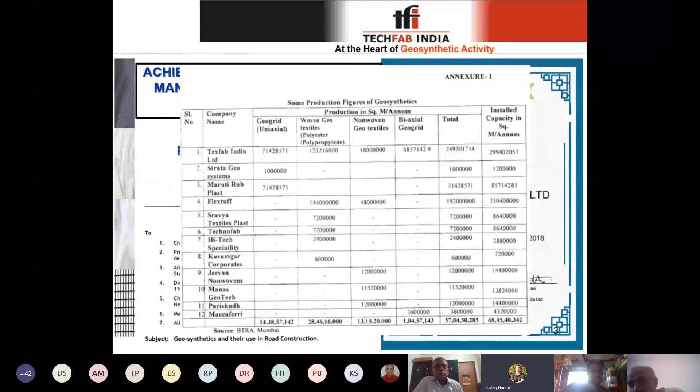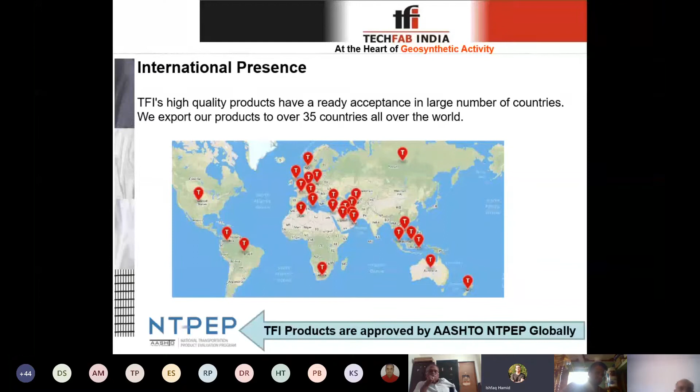Now coming to the baseline of today's discussion, which is application of geosynthetics in ground improvement for roads and associated works. Before beginning the applications of geosynthetics, I would like to give a brief introduction about the basics of ground improvement.

As engineers, we face difficult ground conditions at a project site. We have to employ various possible strategies to achieve the project objectives. The strategies include modification of the existing physical properties of underlying ground in order to enable effective, economic, and safe construction in practical timescales. So we can say that it's a process to alter or improve underlying poor ground conditions containing superstructure, by various geotechnical construction methods for countering insufficient stability, increased settlement, and insufficient bearing capacity.

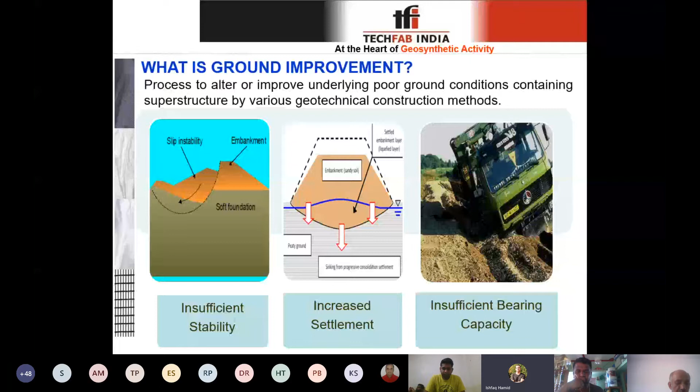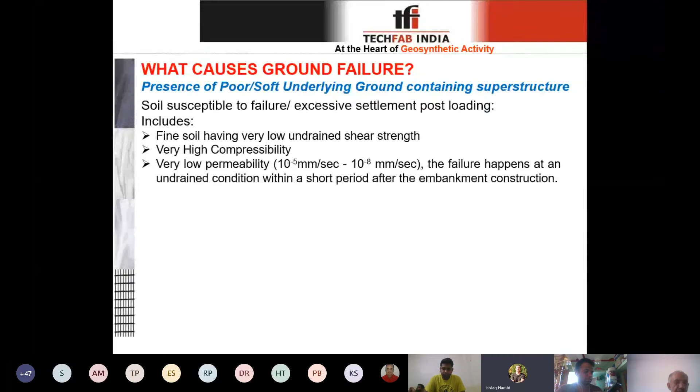The presence of poor or soft underlying ground, which is the basic cause for ground failure, includes soil susceptible to failure and excessive settlement, including fine soils having very low undrained shear strength, soils with very high compressibility, and soils with very low permeability. The failure happens at undrained condition within a short period after the embankment is constructed.

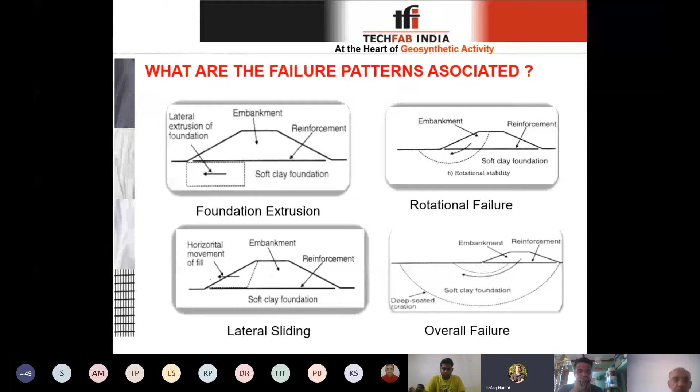On a similar note, the various failure patterns associated with this soft or poor ground are foundation extrusion, rotational failure, lateral sliding, and overall failure. Foundation extrusion is the lateral extrusion of foundation beneath an embankment. Rotational failure is your global failure. Foundation extrusion at horizontal movement of fill is your lateral sliding, and a deep-seated failure that leads to the overall failure of the entire foundation.

Looking into the failures, the causes of failure, and the various failure modes associated, there is a need to prevent excessive settlements of subsoils containing structures like buildings and roads. There is a need to improve shear strength of the fill to ensure sufficient bearing capacity of foundations. There is a need to increase the density of the fill mass to prevent liquefaction. And there is a need to improve the permeability in order to increase the drainage capacity.

So in a nutshell, we can say that there is a need for improved stability, a need for reducing settlement, a need for improving the bearing capacity, and a need for reducing liquefaction, or improving the resistance of soil against liquefaction.

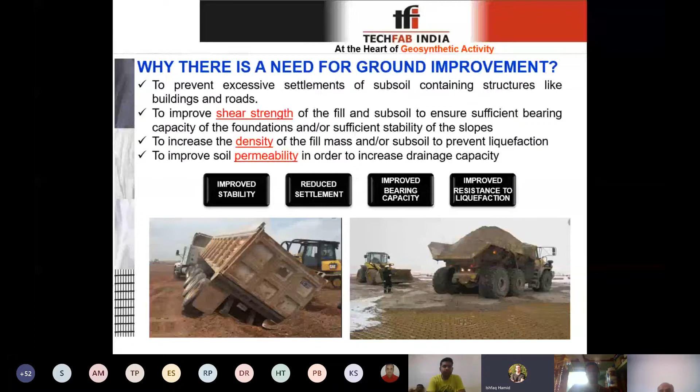Looking into all those needs, all those do's and don'ts, we have seen since earliest times, humankind has found ways to deal with poor ground using simple strategies. The various successful strategies depend upon the type of soil, construction feasibility, commercial aspects, and performance requirements. We shall be discussing about them.

Among all the conventional measures of ground improvement, the first technique which I shall be talking about, which comes very handy, is soil replacement technique. When unsatisfactory material is encountered at or near the surface, it may be economical to remove part of it or all of it. In high embankment projects, removal of 1.5 to 3 meters of unsuitable material from original ground level may be possible for the full width of the fill.

In swampy areas and peat and muck deposits, this type of technique is generally found to be very effective. However, on the whole, this will be governed by the costs involved related to other methods, because anyways, you are going to extract the amount of fill and then replace it with some good fill, and that good fill has to be available in the vicinity of the area.

Another method is staged construction. Staged construction is also a simple and economic method for accelerating consolidation as compared to other ground improvement methods. As the name specifies, it's filling of an embankment at a controlled rate to permit increase in shear strength due to consolidation without failure. However, since it's done at a controlled rate, adequate instrumentation measures have to be taken care of while employing this technique.

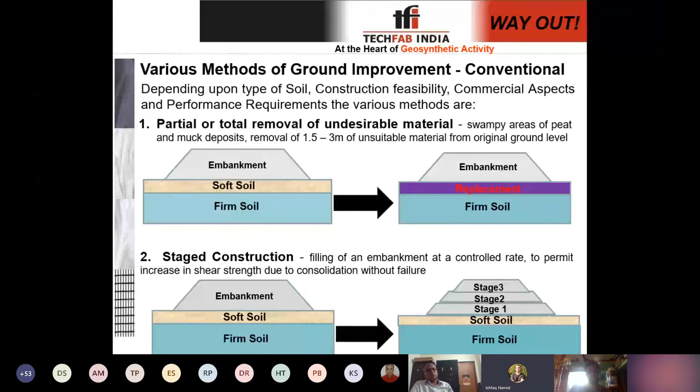Another technique is stabilization, whether it be chemical stabilization, lime stabilization, or cement stabilization. There's a saying about lime, that lime is an excellent choice for short-term modification of soil, especially where the subsoil is of expansive nature, like black cotton soil. And when the depth and extent of poor soil is large, cement stabilization can be opted.

There are other chemical techniques wherein chemical additives are added to the soil in order to form a stiff platform, a solid working platform. The basic intent of this technique is to reduce the plasticity, to reduce the moisture holding capacity, to reduce the swelling index of the soil, and to improve the stability.

For more details, you can refer to IRC SP89, which is guidelines for soil and granular material using cement, lime, and fly ash, for the entire design methodology and the subsequent steps involved.

Another technique, talking about the conventional techniques, is preloading. It's somehow similar to that of staged construction, but other than staged construction, here a heavy weight, a surcharge weight, is placed on top of the embankment in order to increase the rate of consolidation. But as I told you, in case of staged construction and this preloading, adequate instrumentation measures for monitoring the settlements and dissipation of pore water pressure should be essential.

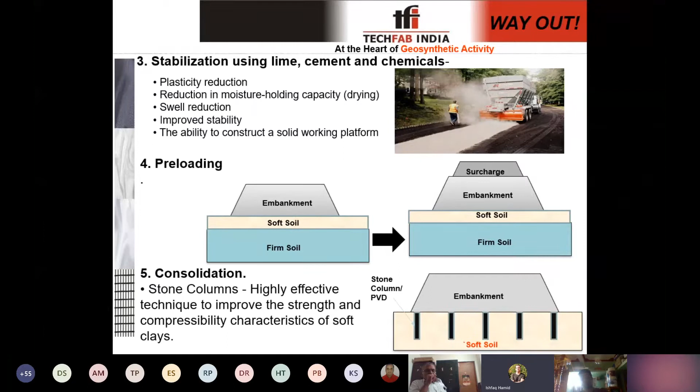So let's now quickly move to the basic context of today's discussion, which is methods of ground improvement involving geosynthetics.

Geosynthetic materials have been used to improve the bearing capacity of the soil and the settlement performance of shallow foundations. Over past few decades, several studies have been conducted based on laboratory models and field tests related to the beneficial effects of geosynthetics on load bearing capacity in roads and associated works.

Today we will be talking about ground improvement techniques using basal reinforcement: Geogrid at the base of the foundation, Geocell mattress at the bottom of the foundation, a subsurface drainage layer used at the base of the foundation for improving the ground, and a separation geotextile layer placed at the bottom of the foundation. Other methods like basal reinforcement with piles, staged construction with inclusion of PVDs, and geotextile encased stone columns will be covered in detail in the next upcoming webinar.

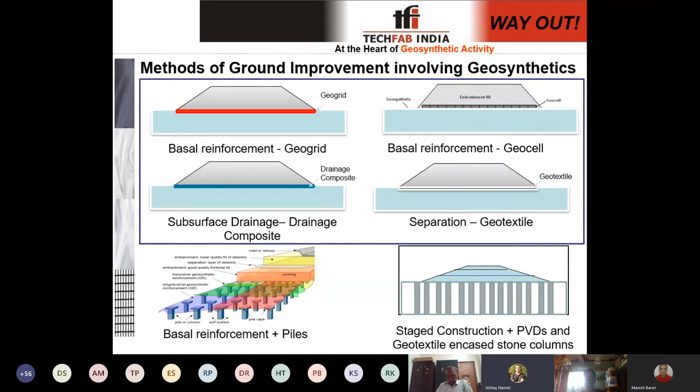So we can see that today, ground improvement for shallow foundations supported by soft soil reinforced with materials like Geogrid, Geocell, drainage composite, and geotextile will be the main crux of today's discussion.

Geosynthetic basal reinforcement is a technique wherein a high strength and stiff geosynthetic reinforcement layer is placed at the base of an embankment in order to improve stability.

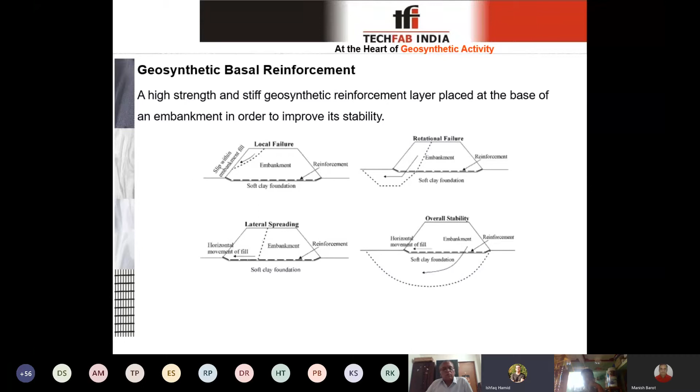This reinforcement is placed at the base of the structure in order to ascertain against local failure, that is slip within the embankment fill, a rotational failure or toe failure, lateral spreading, that is horizontal movement of the fill, or deep-seated failure.

Now, what happens when we are placing a geogrid at the bottom of an embankment or foundation? For any basal reinforcement technique, when you put reinforcement at the base of an embankment, let's say at the end of construction, the entire loads are being encountered by the reinforcement itself.

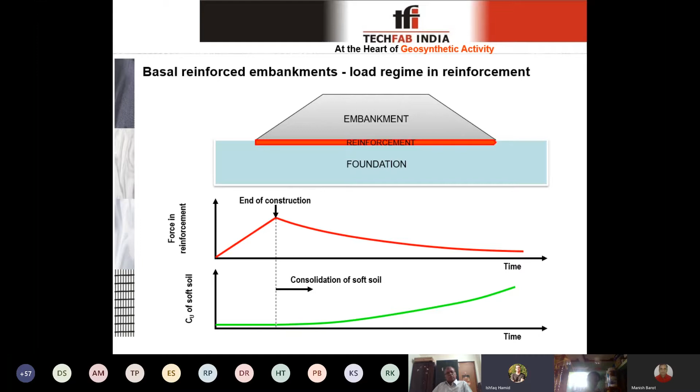But with passage of time, consolidation in the foundation happens at a certain rate depending upon the type of soil and type of loading. After some time, let's say 5-10 years or whatever the consolidation time is, the foundation soil itself gains enough strength to cater to all the loads coming onto it. So we can say after a certain period of time, the foundation is sufficient enough to cater all the loads.

Now, the contribution of reinforcement for stability of an embankment. Since I've told you that today we'll be talking about basal reinforcement using geogrids, geocells, geotextiles, and drainage composites, here we will discuss the contribution of each layer of reinforcement. You can see in the slide, there are two cases.

First case is an embankment that is unreinforced, no reinforcement placed at the foundation level. Second case is an embankment wherein a geogrid reinforcement is placed at the bottom of the foundation as basal reinforcement. In the unreinforced case, vertical and outward shear stresses act onto the foundation, leading to problems like slip failure and lateral extrusion.

Now, in order to counter the same problem, we are putting our reinforcement at the base of a foundation. The vertical and outward shear stresses are now being countered by the reinforcement. The intensity of the vertical forces is reduced to some extent due to this geogrid, and the intensity of outward forces is totally opposed by the reinforcement geogrid.

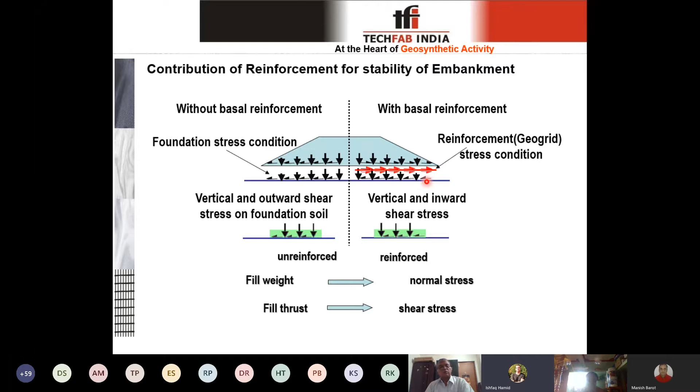On a similar note, contribution of reinforcement at the base of an embankment: again comparing unreinforced versus reinforced case, when we place a geocell mattress layer as basal reinforcement, the vertical and outward stresses get dispersed by the confinement and stress dispersion effect of the geocells. So the loads coming onto the foundation are dispersed and their intensity is reduced to a maximum after using this geocell reinforcement at the base of the foundation.

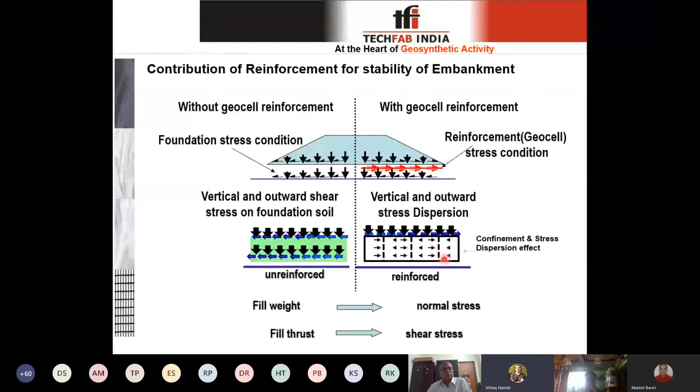Again, the contribution of a separation or drainage layer for stability of an embankment. Earlier we used a geogrid, then a geocell; now we are using a high strength woven geotextile at the base of the foundation. This geotextile will prevent the intermixing of two different fills and will reduce stresses to some extent because of its high strength.

And if the same high strength geotextile is replaced by a drainage layer, let's say a drainage composite, which is a combination of non-woven geotextile and a high strength polypropylene core.

A high strength polypropylene tensile strength core is sandwiched between two non-woven geotextiles. The two non-woven geotextiles act as a medium preventing intermixing of two different fills. The polypropylene core, having its own strength, adds additional strength and reduces stresses coming onto the foundation. Further, the drainage core maintains the safe passage of pore water throughout.

Depending upon the type of problem or scenario we are facing at the site, we can choose among different methods. We have to decide which method to opt for based on what the problem requires. If we don't have much stress to disperse and only need a separating medium, we can go with a woven geotextile layer. Or if we need to improve drainage, we can use a drainage layer. Or else, if there are enough stresses coming onto it, then we can...

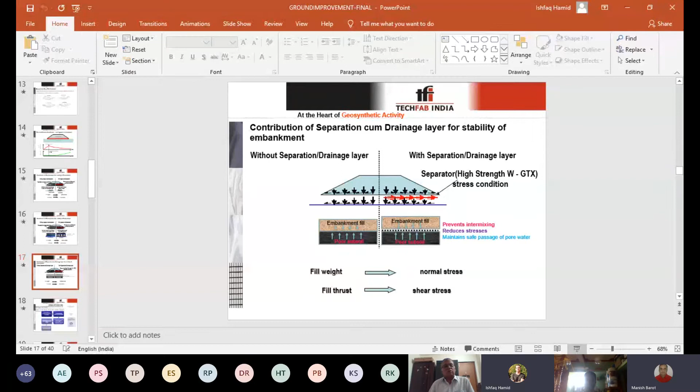So continuing, among all the different methods we were discussing, you can place a high strength geogrid at the base of an embankment just to take care of local failure. You can use that technique.

Or else if there is a problem that our foundation is lagging in bearing pressure or bearing capacity, then you have to improve the bearing capacity of the soil, or reduce the stresses coming into the foundation. Then you have to go with another method, using geocell at the base of the foundation. That is another basal reinforcement technique.

Now if stress dispersion and reducing stresses is not a big concern, but you still need to separate two different filling mediums, then you can go with a high strength woven geotextile placed at the foundation level.

And if there is a problem where you want to take care of drainage coming onto it, so as to maintain the safe passage of pore water, then you can use a drainage composite layer in between the foundation and the embankment fill.

So depending upon the sort of problem which you are facing, you can choose any of the methods we were talking about, because depending upon the contribution of the reinforcement, the entire design methodology will be working on that.

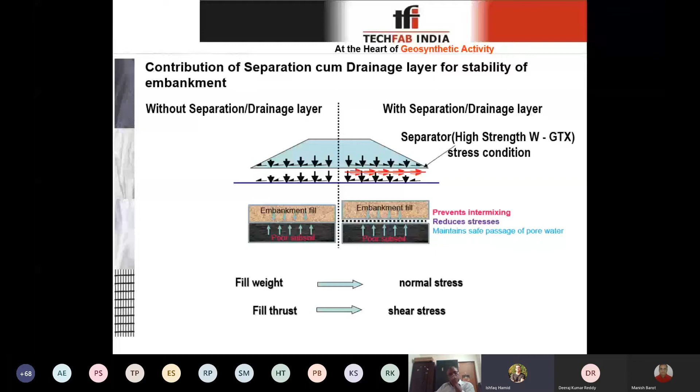Now talking about the design methodology, the design of geosynthetic reinforced embankments on soft soils is mentioned in IRC 113:2013. It's as per section 5.2.11 of IRC 75:2015, and section 3 and section 5.1 of IRC 113:2013.

The design methodology is simple. It involves determination of effective pressure coming onto the foundation, then considering a trial reinforcement at the base, then determining the safety factors against rotational failure using the slip circle method, and determination of safety factors against lateral sliding. Once these factors of safety are coming safe, then your trial reinforcement is okay.

If it's not coming safe, then you have to increase the reinforcement. You can increase the grade of the reinforcement, meaning the tensile strength has to be increased, or you can increase the number of reinforcement layers, or reduce the spacing between the layers, because there are a lot of things which benefit once you are interpolating the data for designing a geosynthetic reinforced embankment on soft soils.

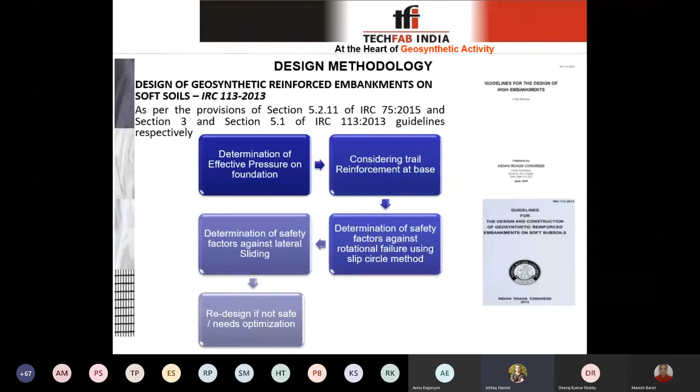On a similar note, the evaluation of bearing capacity calculation methods for Geocell have been given by a lot of researchers, like Koerner's method given by Koerner, Presto's method, apparent cohesion method, and Avesani Neto's method.

The most common thing among all these methods is that the methodology involves initially determining the effective bearing pressure on the foundation, then again considering a trial reinforcement at the base, then determining the reduction in pressure due to reinforcement, because Geocell has a stress dispersion and confinement effect which will reduce the pressures coming into the foundation.

Then determining the safety factors against bearing failure, and though we have reduced the pressures coming onto the foundation, there can still be found some sort of reduction in the settlement also. Then you determine the safety factors against settlement, and if it's coming safe, then it's okay.

If it's not coming safe, then we have to interpolate the data again.

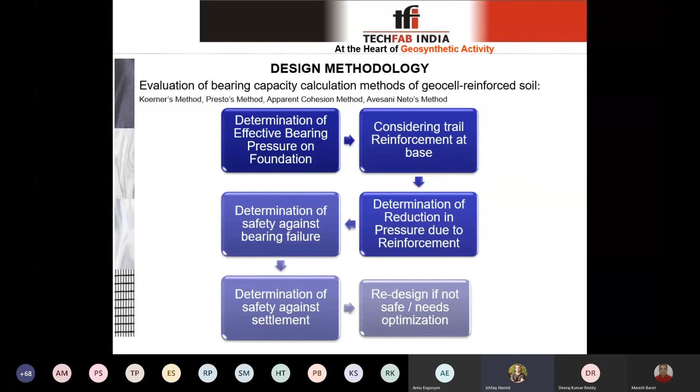Now, how is it done by TechFab India? Because we have been dealing with problems of ground improvement, and we have been employing Geocells and Geogrids for the same for a very long time. So I got this opportunity of sharing with you a sample calculation so that I can tell you how exactly it is done when problems like that come to TechFab India.

As an input, you will get the maximum gross weight coming onto the foundation, from which we can calculate the maximum bearing pressure coming onto the foundation. You will also get the foundation properties and the shear parameters of the soil. Looking into the shear parameters of the soil and the maximum gross weight or bearing pressure coming onto the foundation, you can initially calculate the safe bearing capacity of the soil.

Yeah, you can calculate the safe bearing capacity of the foundation, then compare it with any of the conventional methods. In this calculation, with such shear parameters and such loading, I have done two different iterations. The first iteration was done by replacing a patch of soil beneath the underlying structure.

When it was replaced, let's say 1.5 meters of sand patch was replaced with good soil. After replacing it with good soil, there was certain improvement in the safe bearing capacity which was found, but that improvement was not sufficient enough to cater to all the loading which was coming onto it. So that was only for 1.5 meters of replacement of soil.

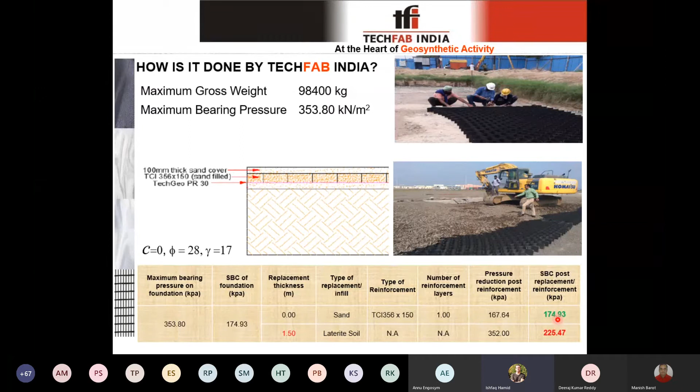But for the similar case, when we used our geocell, one layer of geocell filled with sand, we found that after employing this geocell, the pressure coming onto the foundation was reduced, the intensity of pressure was reduced, and finally the bearing capacity of the soil beneath the foundation was sufficient enough to cater to all the loads. So this is how it works in comparison with all the conventional methods which you have.

In addition to ground improvement, geocells are also used for subgrade stabilization and thickness reduction, as the details are mentioned in IRC SP 59-19, and the detailed example as mentioned in annexure number 4 is also given in IRC SP 59-19.

So geocells can be used to improve the effective CBR of prepared subgrade, and when used in granular material, they can result in considerable reduction in thickness of the corresponding layer. For the entire design methodology, you can refer to IRC SP 59-19, with a stepwise installation methodology mentioned there in conjunction with IIT PAVE and IRC 37-18. You can just design the same.

There are some PMGSY and PWD projects wherein we have employed such methodology for subgrade stabilization. A few case studies I have also attached. I will be sharing that knowledge with you in the upcoming slides.

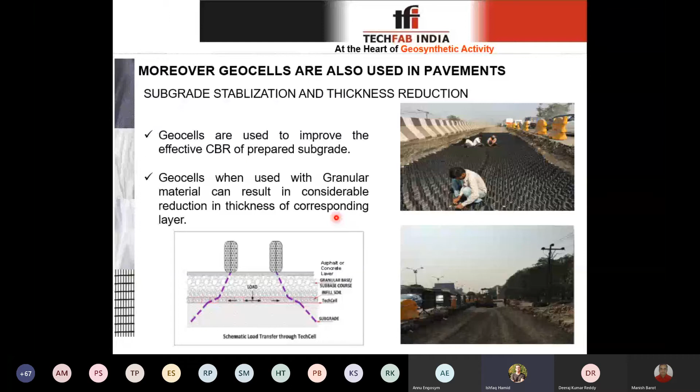The geosynthetic ground improvement, especially the geocell ground improvement, depends upon a lot of factors. The bearing capacity of a geocell reinforced soil changes with various factors: the type of reinforcement you are using, the number of layers of reinforcement, the weld spacing, and the cell depth. These two parameters have a great influence on reducing the pressure coming onto the foundation.

Depending upon the basic design methodology of the geocell load reduction procedure, the geocells which we provide and manufacture are textured with polyethylene strip consisting of multiple rhomboidal indentations over the entire strip area on both sides.

The advantage of having multiple rhomboidal indentations on the entire strip is that the indentations or textureness on the sides of the geocell enable interface friction between the fill and the cell, and that reduces the pressure going into the foundation, reducing the intensity of pressure after using a textured geocell. Further, our geocells are perforated.

The polyethylene strip is perforated with horizontal rows of maximum 10 mm diameter holes. Once a geocell is filled with a granular layer, these holes help in maintaining effective drainage within the area. For instance, if you are using a geocell for subgrade stabilization, you are stabilizing the prepared subgrade while also improving the drainage capacity of the entire pavement structure.

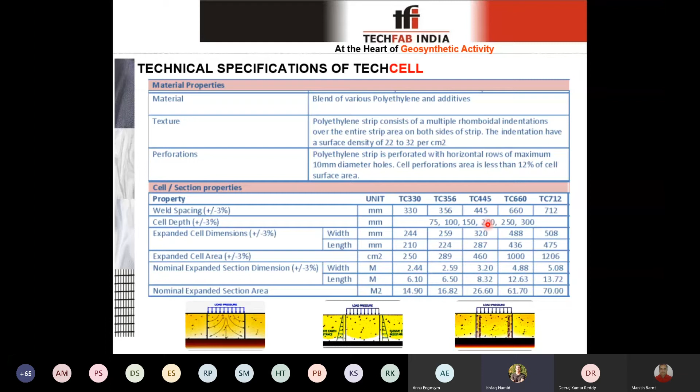Other than that, BIS has also worked into the formulation of guidelines like the Ganga Flood Control Commission, GFCC, which has prepared a different guideline for the use of geosynthetics in river training works. CWC guideline is also there.

But from the past 5 or 10 years, IRC and BIS have speedily started revising and drafting new codes and standards for the use of geosynthetics in geotechnical and hydraulic engineering applications, in order to minimize the exploitation of natural resources and reduce the emission of carbon footprint.

Looking into that initiative, a few BIS codes published recently include IS 16362-2020, a specification for geotextiles used in subgrade stabilization in pavements; IS 17312-20, specification for geogrids for flexible pavements; IS 17373, specification for geogrids used for reinforced soil retaining structures; IS 16345, a guideline for installation of geotextiles used in subgrade separation in pavements; and IS 16380, test methods for measuring pull-out resistance of geosynthetics.

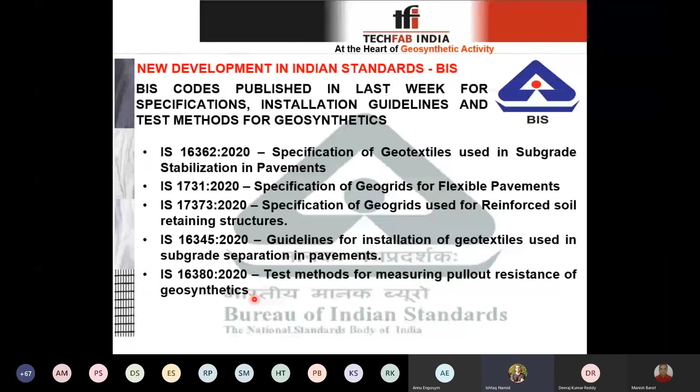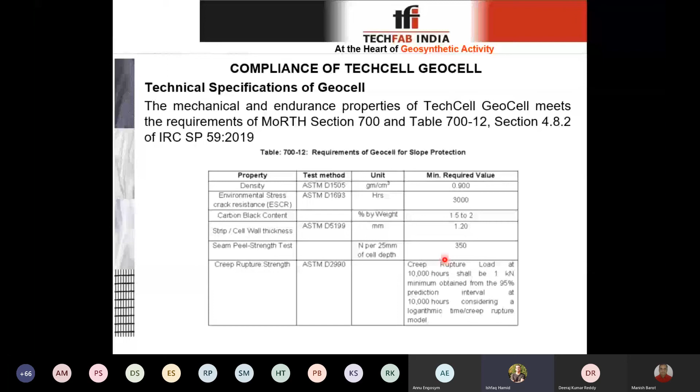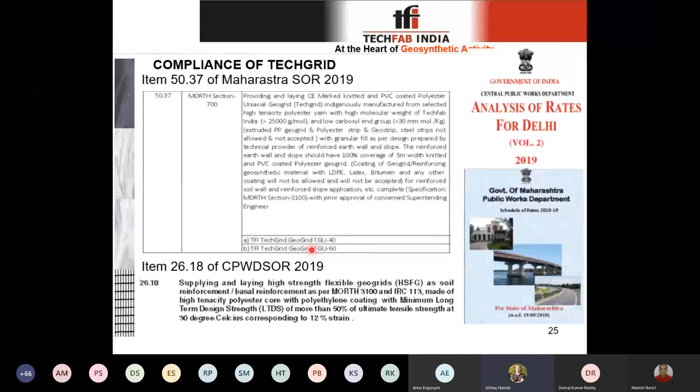Now talking about rate analysis and SORs, item number 50.37 of Maharashtra SOR and item number 26.18 of CPWD SOR 2019 both contain specifications for various variants of uniaxial geogrids used for basal reinforcement for embankments. Item number 50.38 of Maharashtra SOR 2019 provides complete specifications and rate analysis of various variants of geocells used as basal reinforcement foundations.

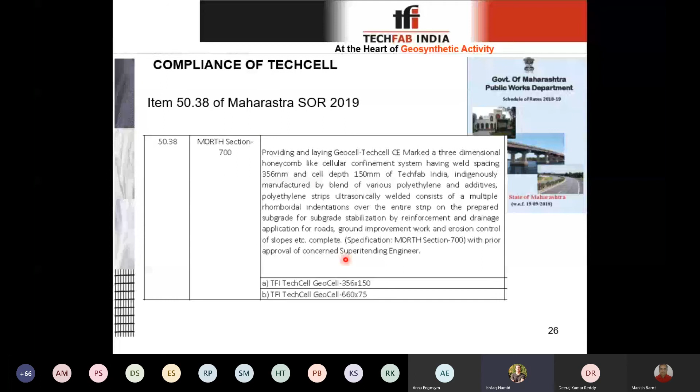As far as product testing is concerned, the important properties of geosynthetics, geogrids, geocells, woven geotextiles, and drainage composites, like creep elongation, connection strength, tensile strength, installation damage, and durability, are all checked by BTRA Mumbai, that is Bombay Textile Research Association, and all our products are BBA, CE, and BVQI certified.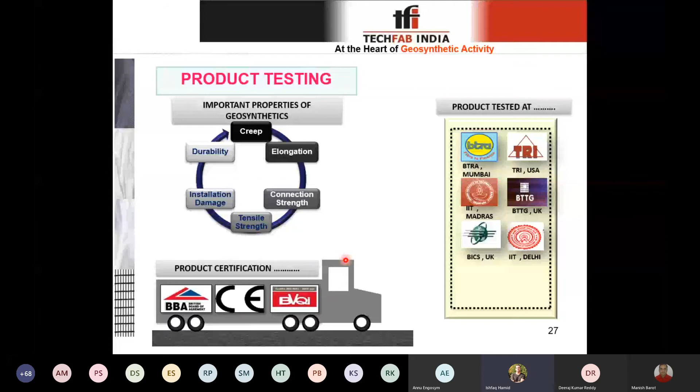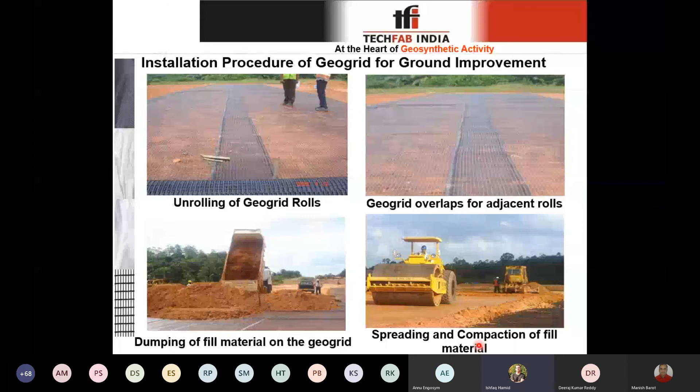Now, talking about an insight into the installation procedure for Geogrid for ground improvement, it includes unrolling of Geogrid rolls, overlapping of adjacent Geogrid rolls, dumping or spreading of fill onto the Geogrid, and finally compaction of the fill material.

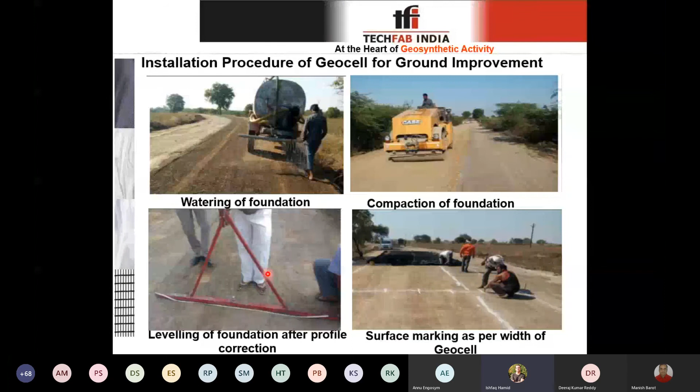On a similar note, the installation procedure for Geocell includes foundation preparation, that is watering of foundation and compacting it, then leveling the foundation after profile correction, surface marking as per the width of the geocell, unfurling of geocell, tying of geocell units with tying band, dumping and spreading of fill onto the geocell, and finally compaction of fill material.

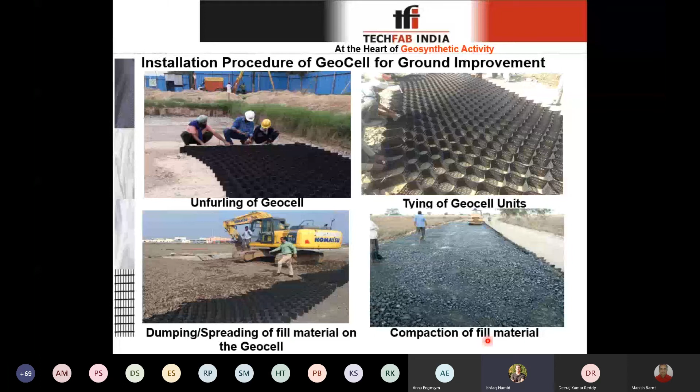Before concluding, I would like to share some case studies of TechFab India, wherein we have given our solutions for ground improvement applications in our own country.

The first one is development of an integrated centralized parking zone for parking of tractor trailers at the JNPT area. JNPT Port Authority decided to build a parking lot to reduce the problem of stranded heavy trucks entering the terminal. The parking lot had to accommodate 1,553 trailer tractors, and for convenience, it was a condition that the parking lot be built near the port for easy access.

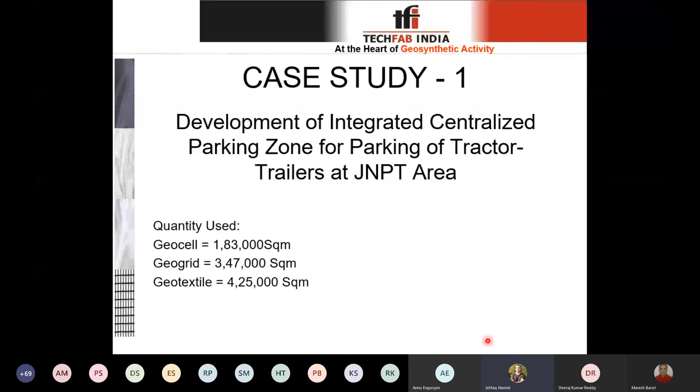Now the problem with the port was that the site was near shoreline areas close to the port, and the foundation soil was soft marine clay. And though it was a parking lot, it had to anticipate huge traffic loading of stationary vehicles.

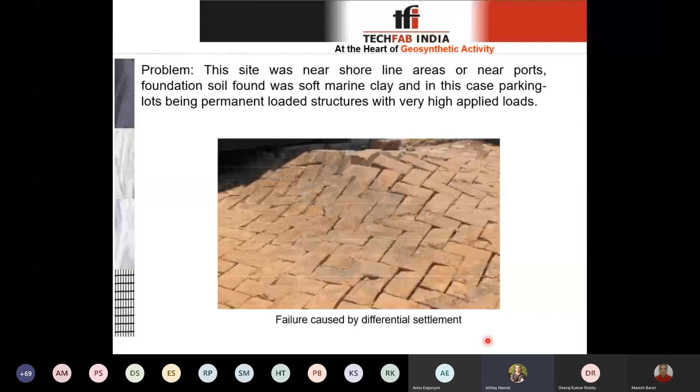For heavy trucks and trailers, the solution proposed was TechCell Geocell infilled with granular material at the base, in conjunction with Geogrid for stabilization and stress dispersion, and a non-woven geotextile placed as a separator beneath the sand layer containing 100 mm concrete.

These are some project photographs of the same site. This is the Geocell, which separates and aids compaction, then a Geogrid layer, and this is the layer of non-woven geotextile.

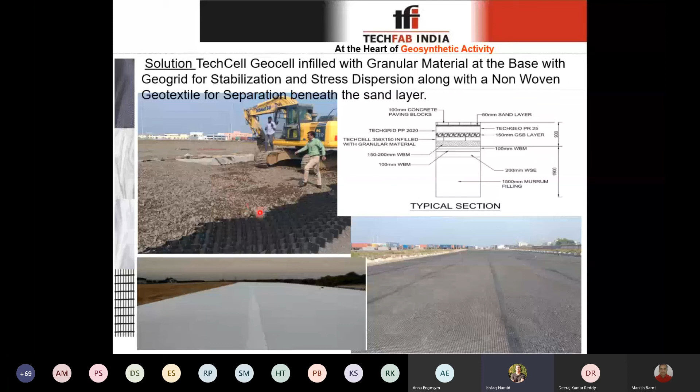Another case study is about a housing scheme with buildings. As I mentioned, ground improvement techniques are not only for roads and associated works, but can also be employed under buildings. One site was in Andhra Pradesh, near the coast, where the foundation soil was black cotton soil with very low bearing capacity.

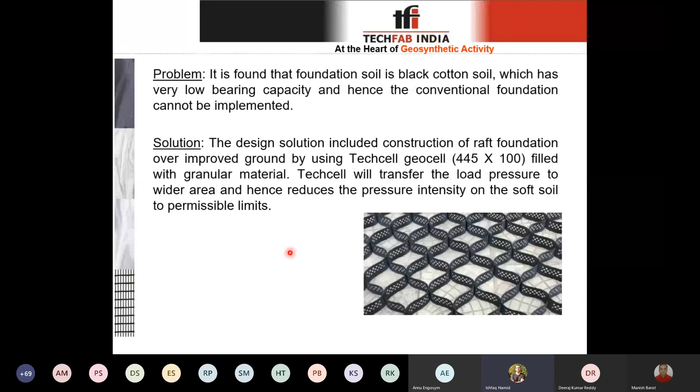It was difficult to adopt conventional ground improvement techniques, so to speed up construction, TechFab India installed TechCell Geocell filled with granular material, intended to transfer load pressure to a wider area, in conjunction with polypropylene biaxial geogrid and polyester geogrid on top.

Just to clarify, this is a low-level housing scheme, so only single-story buildings, not ground improvement for multi-story buildings. Thank you.

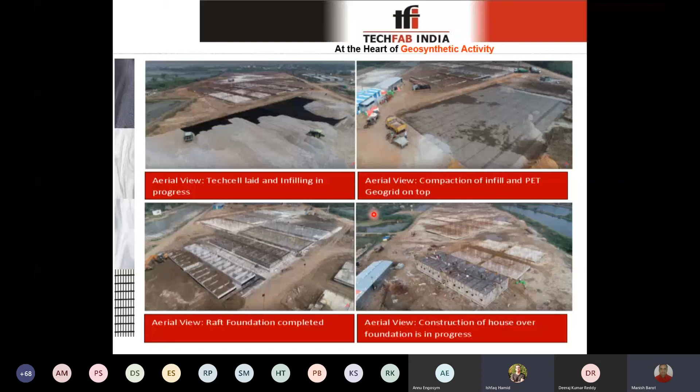This image shows the filling of the geocell with granular material. Some aerial images follow, including an aerial view of the raft foundation placed onto this ground improvement, with construction of the house foundations in progress while we were drafting this case study.

Another case study was subgrade stabilization using TechCell Geocell for the Sion Panvel Expressway, Mumbai, Maharashtra. As mentioned earlier, subgrade stabilization can also be done using this Geocell. This was one of the projects where the client was PWD.

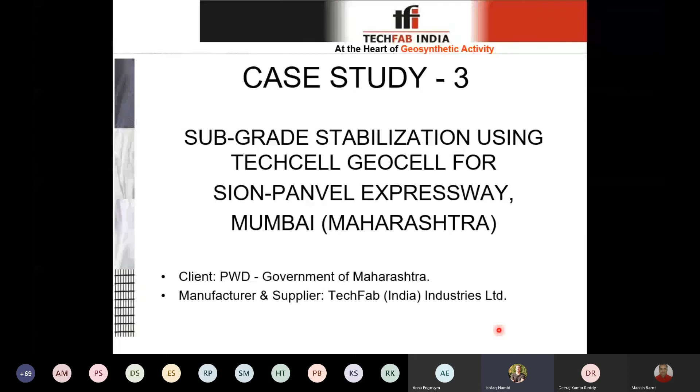The problem is quite evident from the photograph: the presence of potholes in the incomplete portion of pavement built using bituminous pavement. The stretch was 4 kilometers, and after analysis, the issue was that the foundation base was marshy land, unable to support adequate traffic loads for a long duration, resulting in permanent deformations and potholes after the rainy seasons.

So TechFab India came up with a solution of adopting TechCell Geocell in combination with high strength woven geotextile for subgrade stabilization.

These are installation photographs when the Geocell was unfurled and tied together. This is the complete project photograph, and this is the cross section adopted: beneath the GSB layer, TechCell Geocell in combination with woven geotextile was used for stabilization of the subgrade.

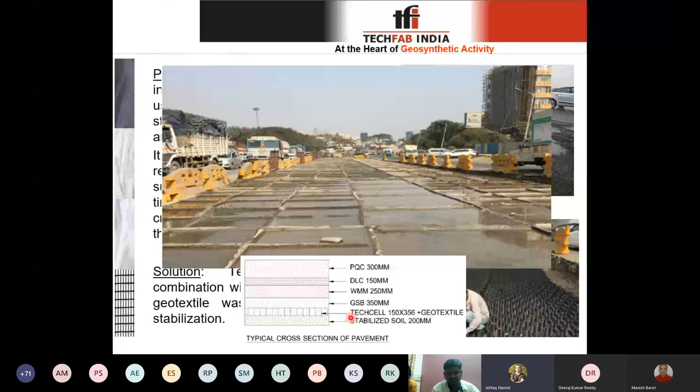Before concluding, a few points: ground improvement using geosynthetics is technically superior and economical compared to conventional ground improvement techniques. Since the initiatives of MoRTH and NHAI specify minimizing use of cementitious material and reducing carbon footprint, our guidelines are intact with them, and the design methodologies and material specifications are included in IRC standards and various SORs like CPWD SOR and Maharashtra SOR.

Geosynthetic technical parameters have all been certified by Bombay Textile Research Association, and TechFab India complies with the Make in India initiative, with a motto of providing engineering and techno-commercial assistance to all stakeholders from project inception to completion. We also manufacture at the highest capacities to supply huge quantities in a short period of time as per site requirements.

Our manufacturing is ISO 9001 quality certified, and our in-house laboratories are certified by NABL and GAI-LAP.

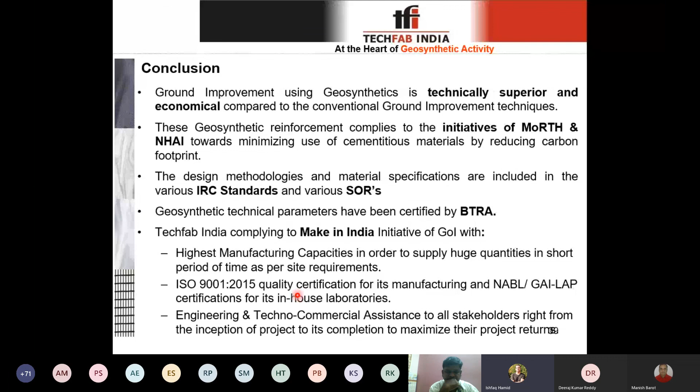This was all about ground improvement applications in roads and associated works. For any queries related to this session, you can write to m.barot@techfabindia.com or i.hamid@techfabindia.com. Thank you so much.